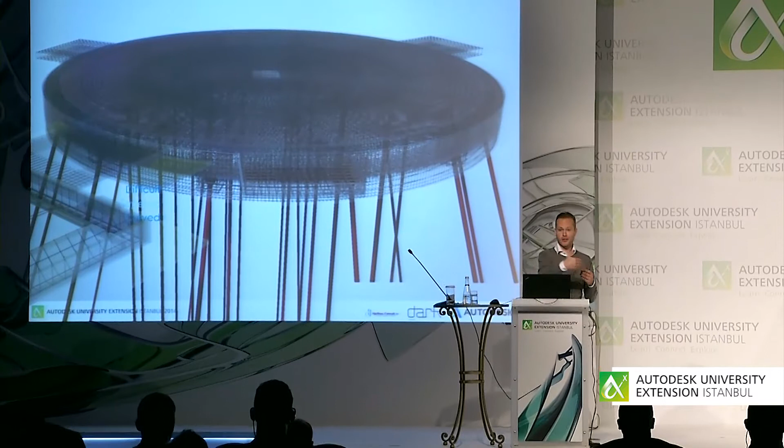And also you have stuff like this. This is a friend of mine from another engineering company in Norway; this was the first project he ever did detailing rebar in Revit, and it was a nightmare because everything is curved. There's not one single 90-degree angle, and it's not the nightmare of, oh, I can't do it and our company is bankrupt. It's the nightmare that keeps you awake at night thinking about how am I going to do this, because you have to model every single bar as single elements and then copy, copy, copy. So this is difficult. It's inefficient, but it's not impossible.

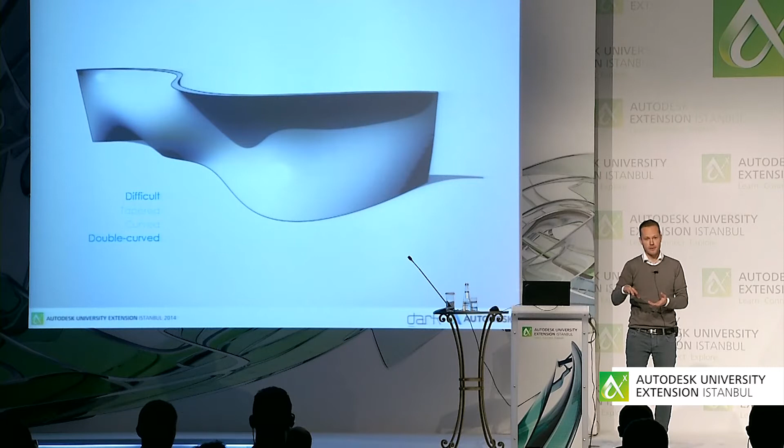Stuff that gets impossible is stuff like this. When you start dealing with double curved stuff, double curved concrete walls, floors, and roofs is almost impossible, I would think. The only way to draw a wall like this inside Revit is if you have a conceptual mass, and you're dealing with splines and stuff, and you stitch a wall to that double curved surface. And when a wall or a floor is hosted by a mass inside Revit, you can't even access rebar tools in Revit. So this is on the borderline between impossible and really inefficient.

My previous company, Ramboll, the company I worked with when I did all this work with rebar, did this project. It's a cathedral in my hometown, actually, which is way, way, way up north in Norway. And special about this project is that every single concrete wall tilts slightly inwards and is curved. So I don't know if it's double curved, but it's pretty complex to model rebars in 3D in this project. So they did everything else but rebar in 3D inside Revit, but all the rebars were afterwards modeled with just lines and Excel spreadsheets like before.

Now, actually, I've done this presentation before, and this list of stuff that's difficult inside Revit was longer. The first time I did this was in Las Vegas in 2012. The list was really long, but it gets shortened every year. Every year a new Revit comes. So all the stuff that was difficult before, except the tapered member, the curved stuff and the double curved concrete, has been moved to the easy part. So this is getting to be a better presentation over the years.

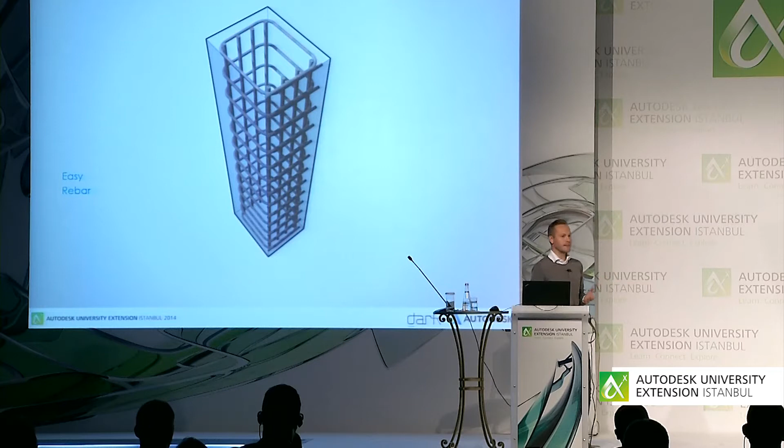So the easy stuff: everything that is 90 degrees, everything that is rectangular, everything that is uniform, straight, which at Ramboll was like 99% of all our projects, is really easy. It's really easy to deal with the hooks and the shapes. National code shapes, no problem. Custom shapes: I did some modifications to the rebar shape families inside Revit to make them work in our company, in our region of the world. And they are really cool once you get to know the small hacks that you have to do. Small hacks that will enable you to deal with angle-driven rebar shapes that don't come out of the box with Revit, that you have to make yourself.

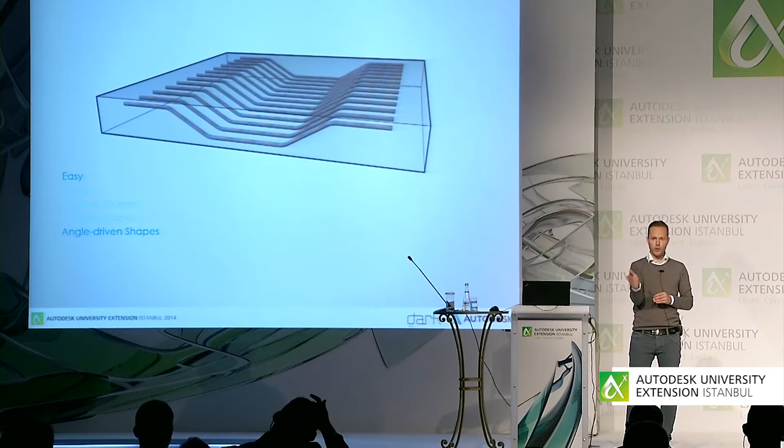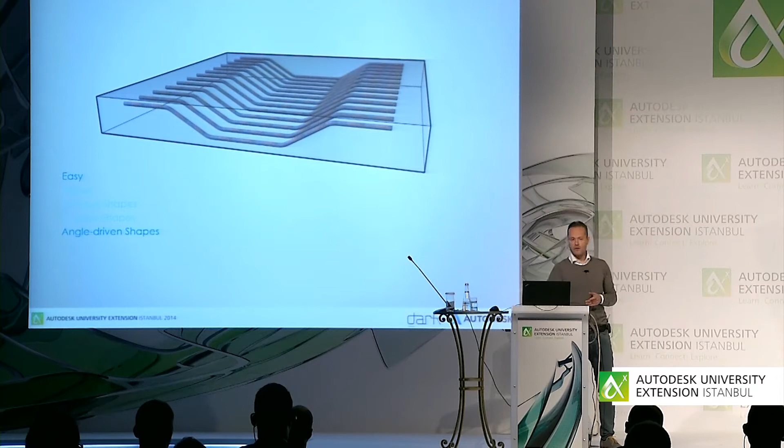In 2010, Revit took a slight change of direction when it came to rebar detailing. I had a meeting with one of the presidents in Autodesk at AU in Las Vegas, and we were talking about this. One of the first features that they introduced after that meeting was the ability to host three-dimensional rebars inside big areas, floors and walls, stuff like this. It became insanely more efficient in, I think, Revit 12 or 13. This was huge. And this was the day when this feature was introduced, and I'll show it to you afterwards.

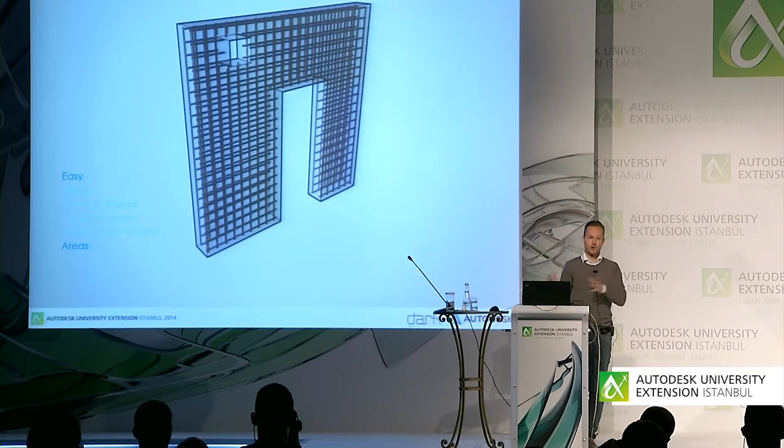Same thing you can do with path reinforcement. So area and path reinforcement in Revit was previously not, you couldn't schedule it, you couldn't see it in 3D, but now you can do both. And this is just a simple exercise for showing how path reinforcement can host three-dimensional rebars. Wire fabric mesh was introduced a couple of versions ago. They work really well, both for detailing and just rough design.

And one of the biggest problems with Revit and rebar was the problem that has to do with symbolic representation, because there's no element in the building industry that has the same amount of quantity. And that relates directly to problems of communicating. How do you communicate rebar design? Because if you have a plan drawing and you're looking at all the rebars as black, you cannot send that drawing to a contractor because it's impossible to understand.

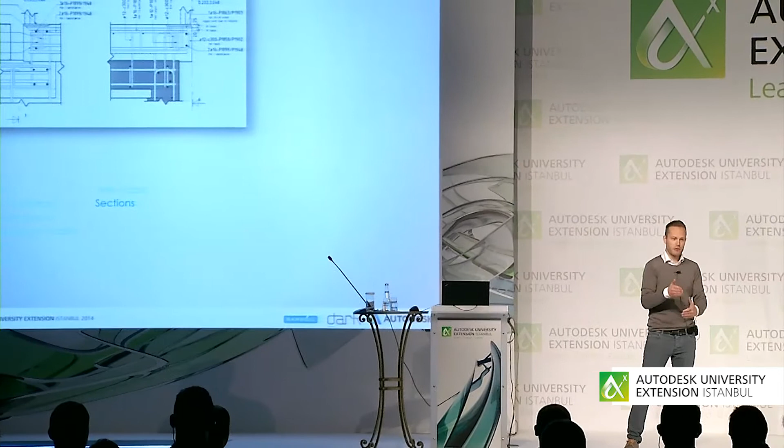So for 10 and 20 years, people have relied on symbolic representation. You draw one bar that represents a whole range of bars, and then you have some text that says this is really a number of bars. And this was impossible in Revit previously. So the good thing previously was the small sections, because then you're actually looking at how it looks in reality, and you're not relying on symbolic representation. So sections have always been really efficient inside Revit when it comes to reinforcement design.

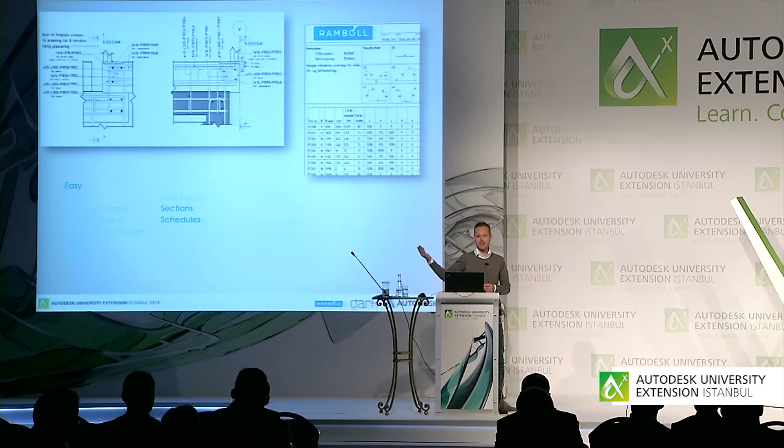And also schedules, because you have a live parametric database, so every single rebar you change is automatically updated in your bending schedule. This is both good and bad. We have some issues with bending schedules. You don't want your bending schedule to change unless you have control. So there's some quality control issues with this, but I'm not going to go into detail there.

But basically this is one of the things that we had to introduce. When you introduce new technology in a company or in a project, I always like to do it face-to-face. So one of the things that we had to do in order to make this work was to do a different bending schedule than we did before. Before, bending schedules were done in Excel. You had 10 bars on each side, and you have lots of A4 papers. This is difficult in Revit.

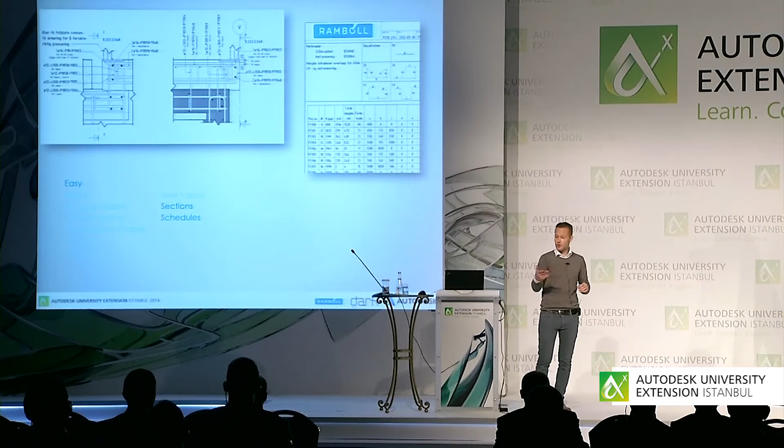So I went down to the contractor. I brought the new bending schedule. It was larger. It had more bars. And I sat next to him for like 30 minutes, explained why this is good, and showed him a beautiful 3D section of the rebar. And he said, okay, we'll do this.

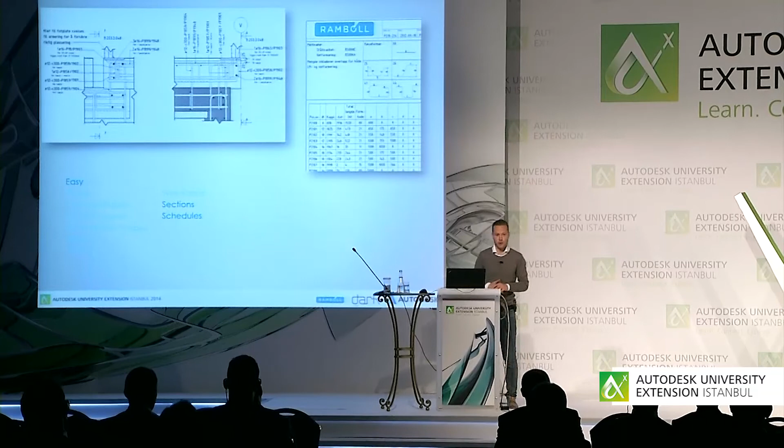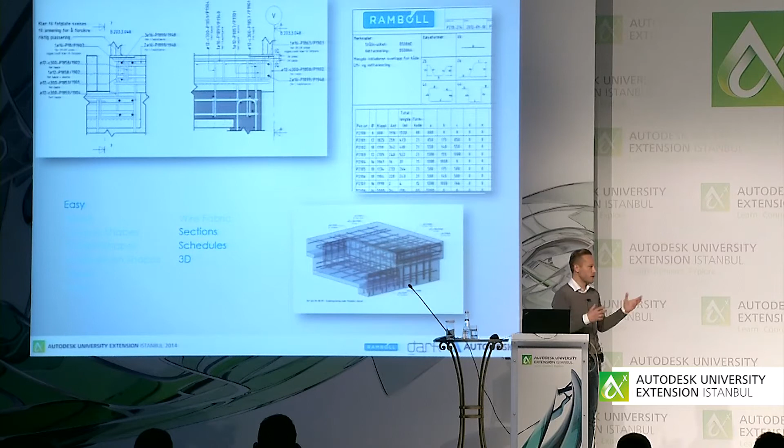Which brings me to the 3D. When you have modeled everything in 3D, you have a fantastic way of communicating with people. You can show them a section boxed 3D view inside Revit with transparent concrete, with all the rebars tagged for information purposes. And now also with 2015, the big enhancement of productivity inside Revit is that this is actually a plan drawing that one of my colleagues did at Rambøll. Peder is his name.

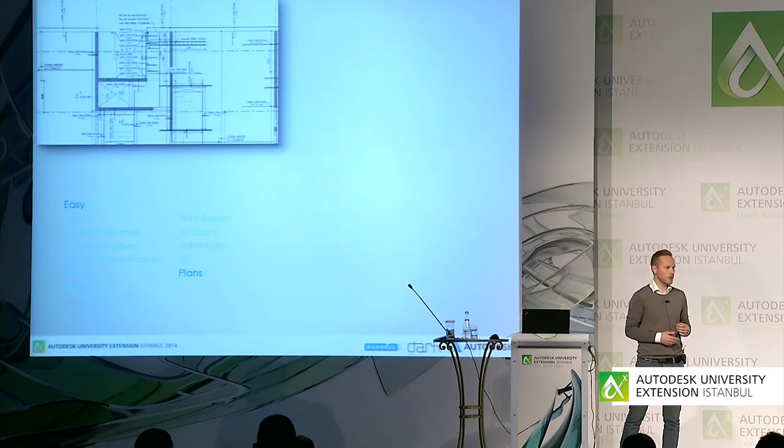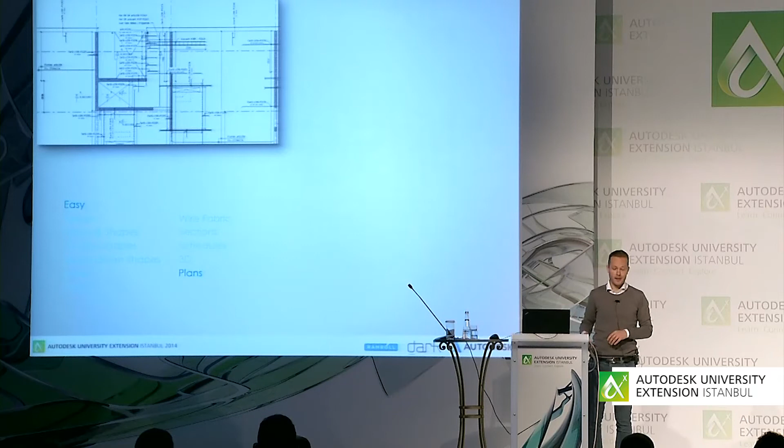And up until April this year, we had to model all the rebars in 3D for scheduling purposes and the 3D. But then we had to draw detail components inside Revit on top of the drawings afterwards for it to be understandable for people. My friend Peder didn't know anything about AutoCAD, so he would rather do that in Revit. I'm happy he did, but now this is automatic. I'll show you afterwards. Same thing with big sections. Everywhere you have to rely on symbolic representation of a set of rebars. It's much easier now.

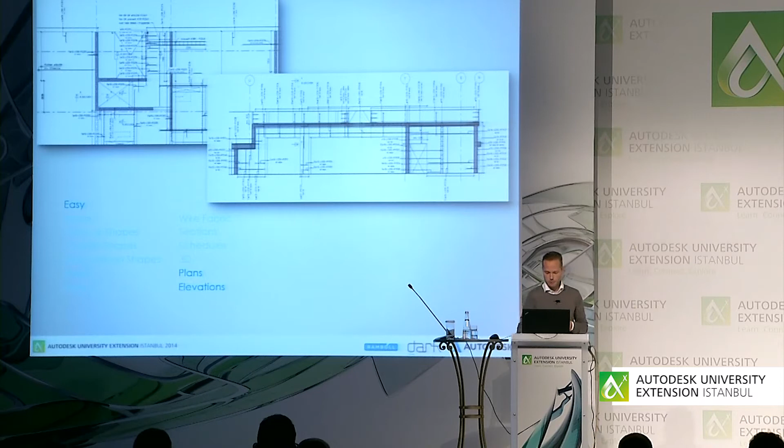Just a short selection of the first projects that we tried. Like Lynn said, we didn't go all in on the biggest project we had. We tried a small project first. This is just a simple retaining wall outside the capital of Norway.

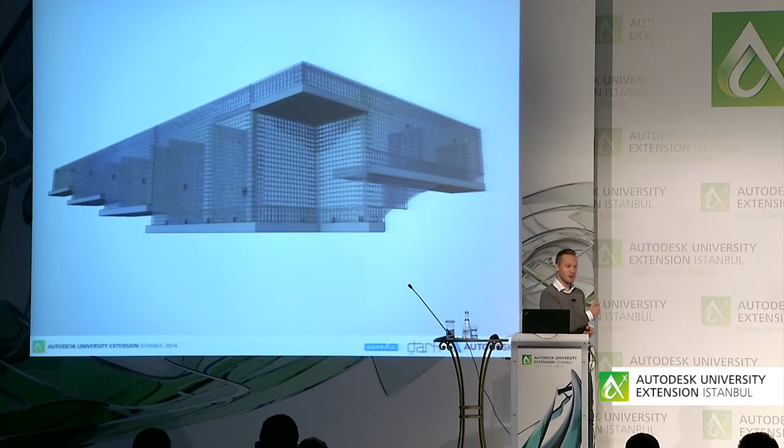And I modeled this, and I can say with my hand on my heart that it was pretty fast and pretty nice to do. I had to do all the symbols with detailed components afterwards, but it was pretty fast to model it. You just have to have a lot of sections and a 3D view with solid rebar. I'll show you afterwards. My friends, this is Erling's work.

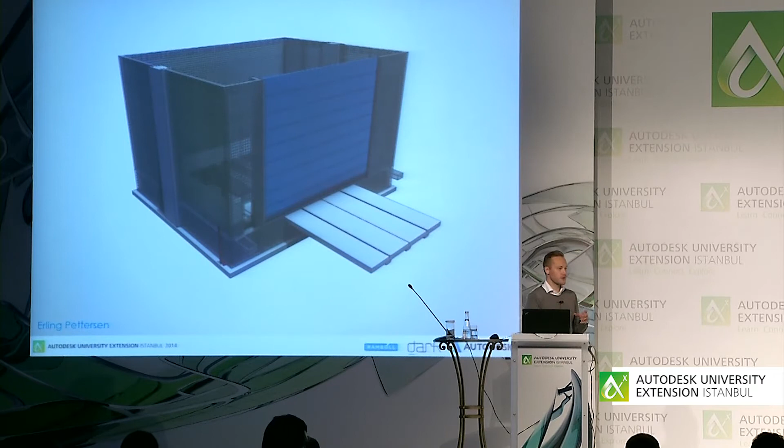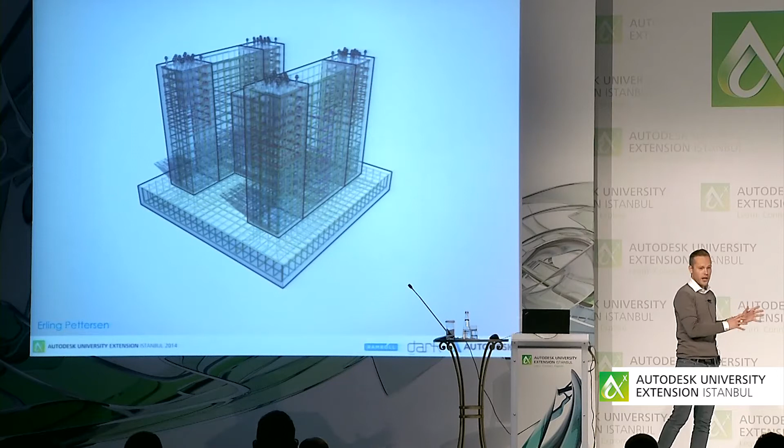A lot of rectangular buildings, as you can see. This is like small power stations. Really fast to get all that rebar inside. And when you have 3D views, you can do cool stuff like, of course, with transparent concrete, you can put on some shadows, work with ambient shadows, and also view filters for color overrides and stuff. This is pretty common for all 3D detailing software with rebar.

More power stations, and then we moved on to bigger stuff. And I'll show this Revit model afterwards with all the rebar in it. This is an apartment complex inside Norway that my company did. And it was the first sort of semi-big, medium apartment project that we

modeled rebar in. A thing that I forgot to mention is that as a Norwegian engineer in Norway, and I think across the Nordics, I have to detail every single bar that goes into cast-in-place concrete. Every single bar. So in this project here, there are some prefab structures, but basically everything you see has to be populated by tons of rebar.

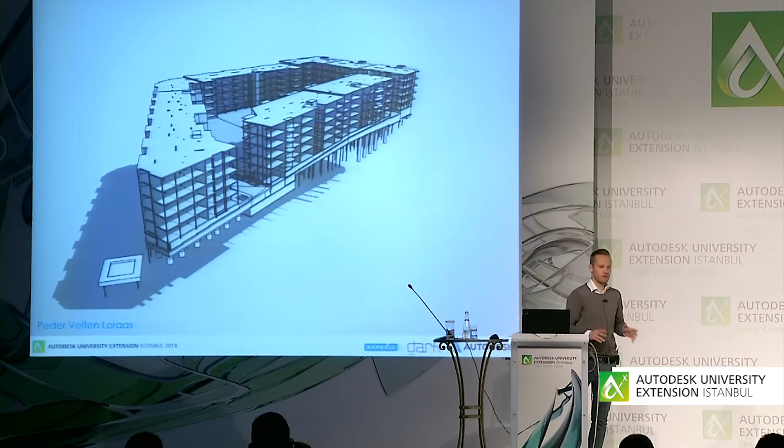And of course, everything I do in Revit, I have to make a perspective and make it beautiful. I think rebar is beautiful. When I go to job sites, I have to go and feel it and look at it, and I think it's pretty nice to see it through concrete. One day I have a dream that I will be able to see transparent concrete on a building, so you can see your rebar designs in real life. Because this is the stuff that people never see. I think this will be beautiful.

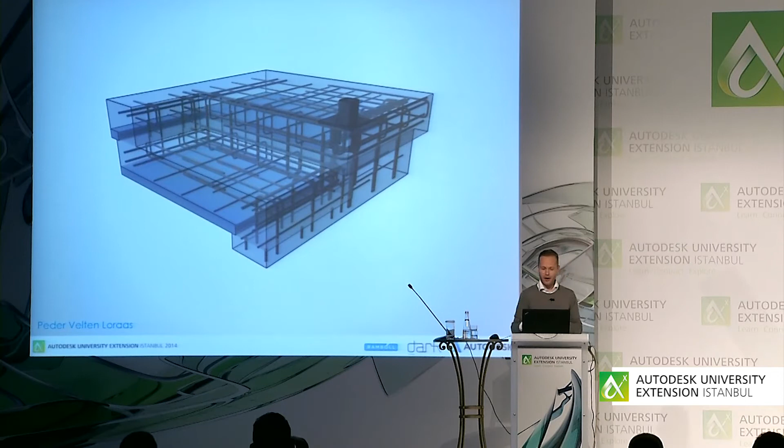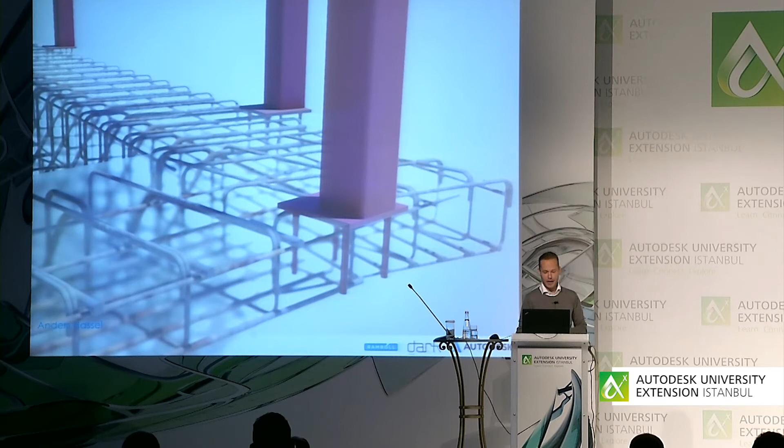So with that, I'll move to Revit, which is actually my favorite software, far more comfortable inside Revit than PowerPoint. So I'll just give you a quick, simple demo of how this works. The first thing that I always do when I deal with rebars inside Revit, I go to structure, reinforcement settings. You have 3 settings. You have the cover settings, you have the reinforcement settings, and you have the reinforcement numbers.

Rebar cover settings, pretty easy. When you click on a concrete element inside Revit, it doesn't have cover settings where you can type in any kind of cover. It has a selection of covers that you can choose from. And this you can set in the rebar cover settings. I'll go fast. Reinforcement settings, you got some general settings. This first one's very important.

That's actually the tick mark that makes all your area and path reinforcements host 3D rebar. So this you absolutely have to have on in case you want 3D rebar inside all that area and path reinforcement. The second one was introduced, I think, last year. You can now choose to not have rebar hooks in your rebar shape definition. I don't know if that makes sense to you. I always keep it on. The moment you

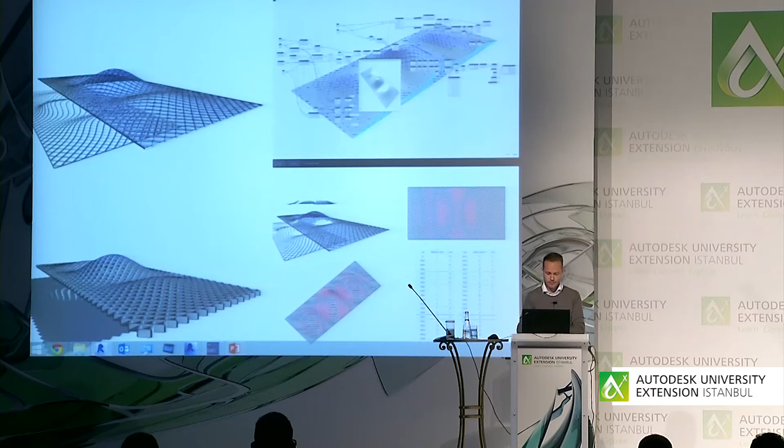I'm sorry, guys, but I think I forgot to switch to Revit. There we are. Can you see my screen? Okay, so a quick recap. I'm inside Revit. I have a beam. I go to structure, reinforcement, cover settings, and reinforcement settings. Sorry about that. Windows 8.

So you want to keep these on. You can go to reinforcement rounding and do some stuff that will help you work with bending schedules inside Revit. So if you don't want to model every single bar to the nanometer, you can have it round inside your schedule and then just model it roughly. It works on bar segment lengths and total lengths. And then in 15, the new feature that was introduced with reinforcement representation. I'll show this in a different way.

Now the cover setting, when you click on a beam like this, you have on all concrete elements inside Revit parameters for rebar cover top, bottom, and other. Other is, for a simple beam like this, the sides.

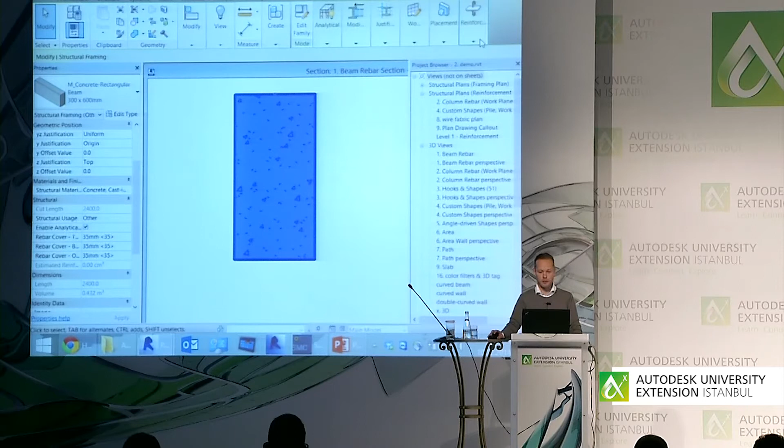So I normally model rebar by going to the reinforcement tool. I click on the concrete element first. I go reinforcement rebar, and then I choose a rebar shape from the rebar shape browser that automatically pops up. If it doesn't, you can also use this pull-down menu here.

And then I choose the rebar diameter from rebar bar, 12, 8, 14, 16 millimeters. This is all set up in your template, I hope. The rebar bar really just populates two important parameters, the material and the bar diameter. All stuff like bend diameter and hook bend diameter and all that stuff that's in your national code just goes into your template and you never touch that again.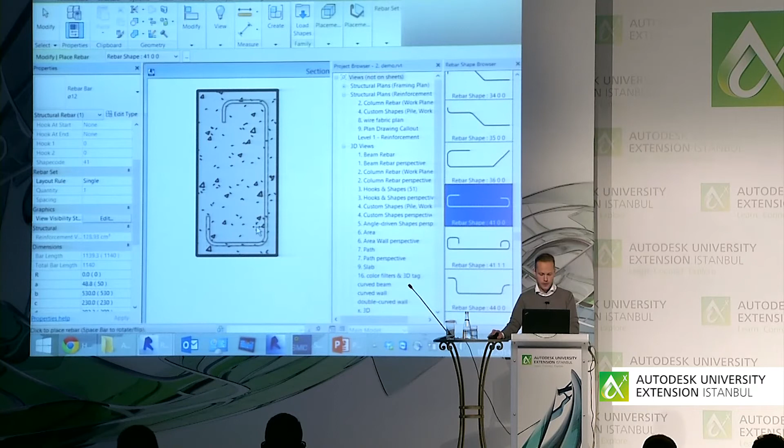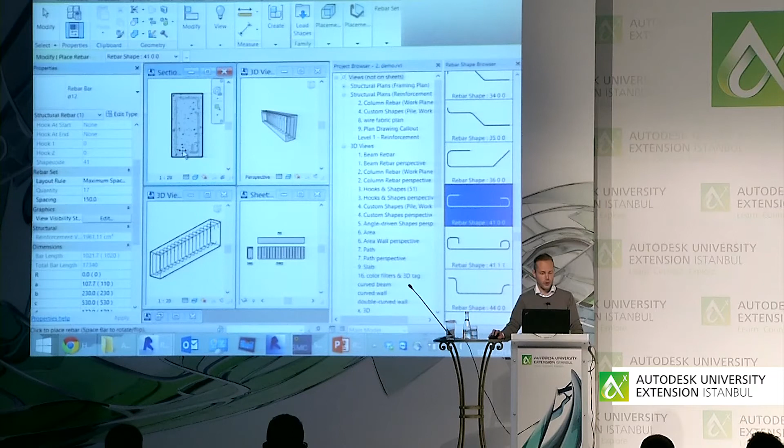Due to screen resolution issues here, it's sort of hidden, but the first thing that I always do is, let's pull up some views here. Is this possible for you to see? So I go rebar set, and then you can change it to maximum spacing with a spacing, say 150 for instance. And then when I populate my beam with rebar, you can see that it turns up in your 3D view.

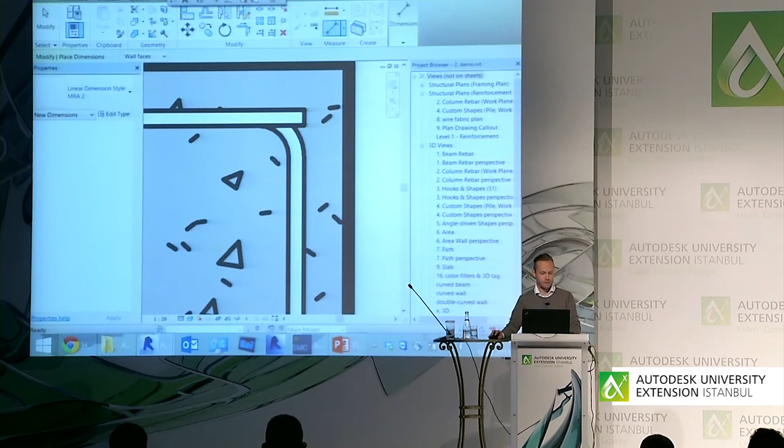Actually, with a pretty irritating small feature that it will not automatically always extend to the outside of your cover setting. So sometimes I have to pull these out like this. The rebar will always snap to your cover. There's a tolerance, so if you pull it to the cover, it will always snap to the cover, but if you pull it like this, it will release the snap to the cover. So this is both good and bad, depending on what you're doing.

If you, for some weird reason, need this rebar to go just 1 millimeter from the cover, that's going to be a little bit difficult, but you can work around it by clicking on a rebar and changing the host to another host temporarily. I miss this feature in Revit, I want to sort of explode or freeze stuff so that it doesn't change. That would be nice, I think. And one way to do that inside Revit actually is you can just group an element. Just click on an element and go create group. It will sort of freeze the element.

So let's have a look. I'm going to minimize this at a perspective view, of course. One thing you need to keep in mind with rebar is that it will always default to a single pixel thickness in your 3D views. And this is odd behavior again. You can change this by clicking on a rebar and using the parameter view visibility states inside the properties. So this is normally what I do.

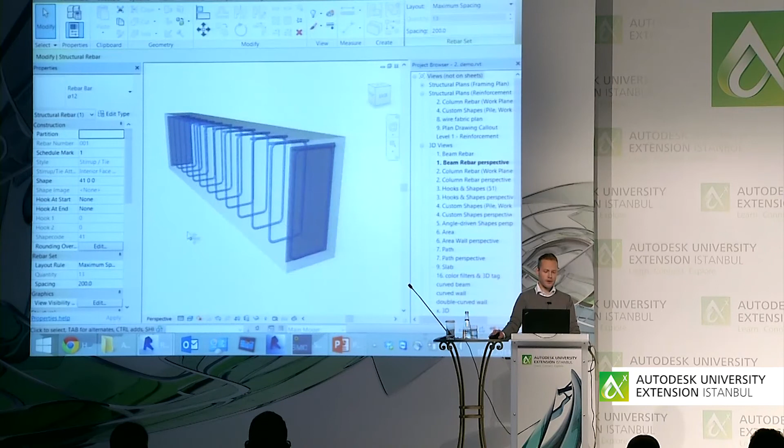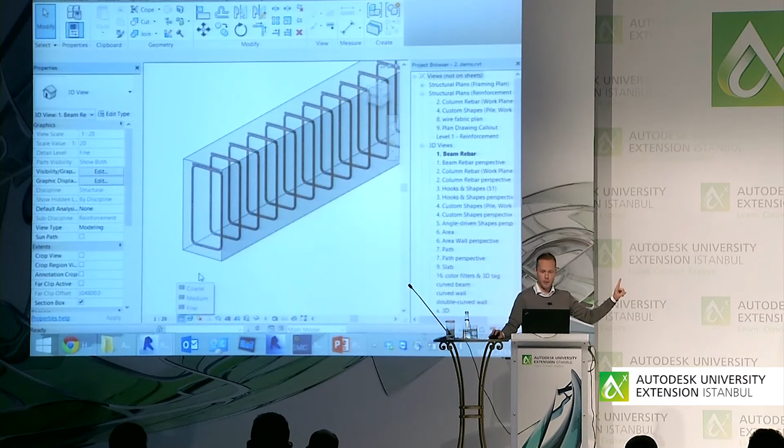There's sort of limited stuff you can do in a perspective view, but if I open an orthographic view, also, you have to be in fine detail level. If I change it to medium detail level, it will force the 1 pixel thickness of the rebar. Let's change the length of this beam to 3.5 meters. It will automatically expand all that rebar. Well, it expands somewhat. Let's try something different. 5 meters. It actually does, but I have a section box here. Sorry about that. 2 meters, 2.5 meters.

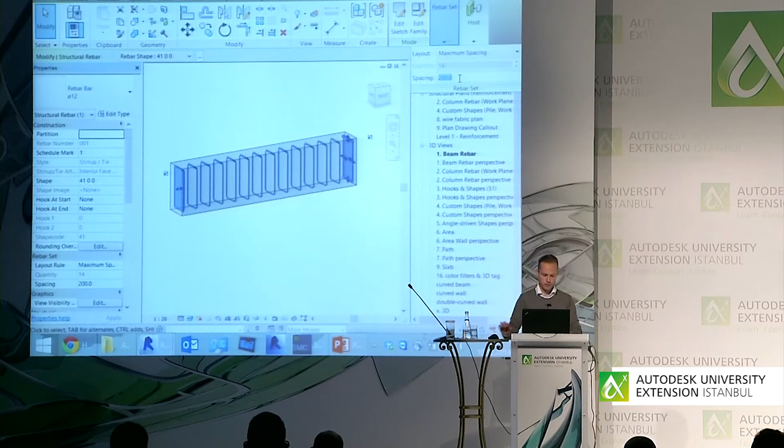And let's change the rebar set again to 100, really tight stirrups there. Okay, so that works pretty well. Also, if you change the section of your rebar from 3 to 4, it will always expand. So the rebar will follow your covers. It's hosted by the element. And this is very, very nice when you're designing. But when you have issued your bending schedules, you want to maintain control of what you're doing.

So let's change that back, and then I go back to the section. I have a sheet here with some more views. So let's add some main rebars to this beam. I go rebar, and then instead of having the placement orientation parallel to work plane, I go parallel to cover. I change the shape to a straight shape, and the section to something bigger, 32.

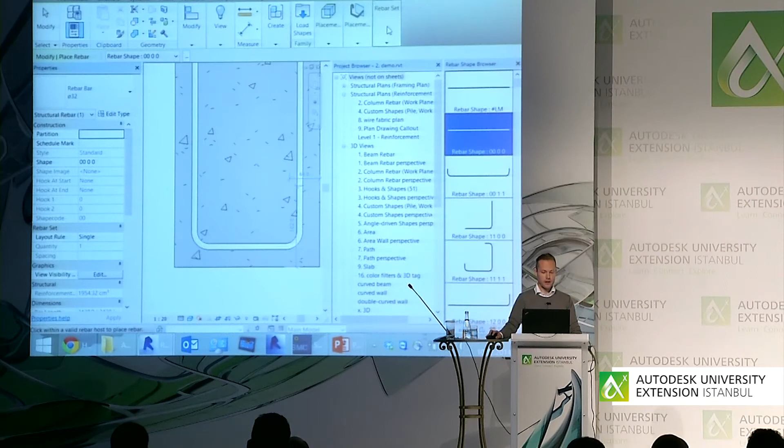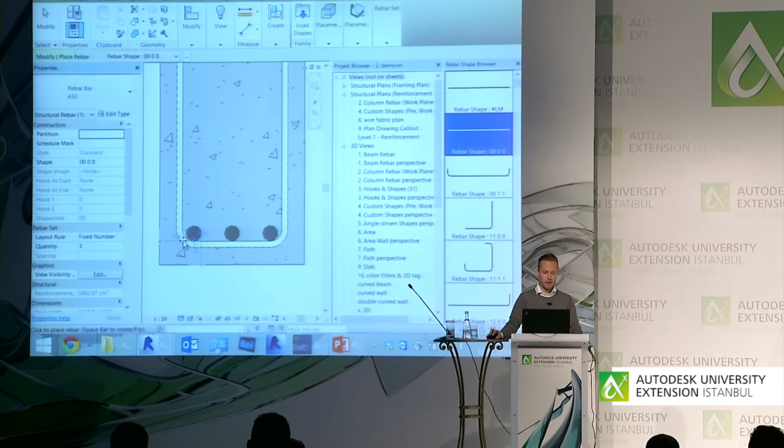And then I go rebar set, single, fixed number, 3 or 4, and then you'll see that the orthogonal rebar will snap to the insides of your stirrups. This is also pretty nice. Lots of good automatic behavior here. Oh, I clicked wrong. Let's do that again. Like this, and then like this, and then I delete this one, and then I change this to, let's say, 2.

Now, in case, for some kind of reason, you don't want this rebar to snap to the stirrup, you have to change the setting inside the rebar shape family. This comes from the automatic behavior connected to the style of this rebar family. So rebars inside Revit, when you model a 3D rebar like this, are made of 3 sub-elements. You can sort of see them in the project browser here. Sorry, there we are, families.

You go down to structural rebar. You have the rebar bar, which is the material and bar diameter. You have hooks, which basically just have like 3 parameters. And then you have the rebar shapes. And the rebar shapes inside Revit is the only family that you can edit in the family editor mode. And you can see this if you click on any kind of rebar. You have a selection here, go edit family.

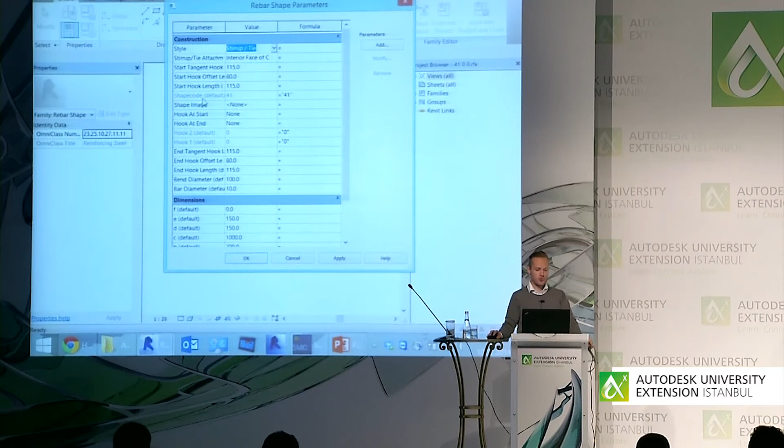If I click edit family, what I really open then is the rebar shape family. That is like the 3rd subcomponent of the rebar. So this is where you set up your rebar shape. And this particular rebar shape is a closed stirrup, and it has all the settings. Like you can go here and say that it shouldn't be a stirrup tie, it should be a standard rebar, and then the orthogonal rebars won't snap. Lots of custom stuff you can do in here. I added some shape codes and some hook parameters for scheduling purposes.

There's also a weird thing inside the rebar shape family editor. I'm just going to show this to you quickly. No other family inside Revit, in any version of Revit, can have one parameter control 2 different segment lengths. So if I change this parameter here to A, for instance, now you have A here and A here, and I can change the length of this to 280. A here will still be 200.

Now, in case you're not too familiar with Revit, you go, what is this? But this is like magic, Revit magic. And this actually enables you to do stuff inside Revit with the rebar shapes that you cannot do in other families, like modeling closed loops, modeling lines that are on top of each other. I'll show you a rebar shape family that's simpler than this.

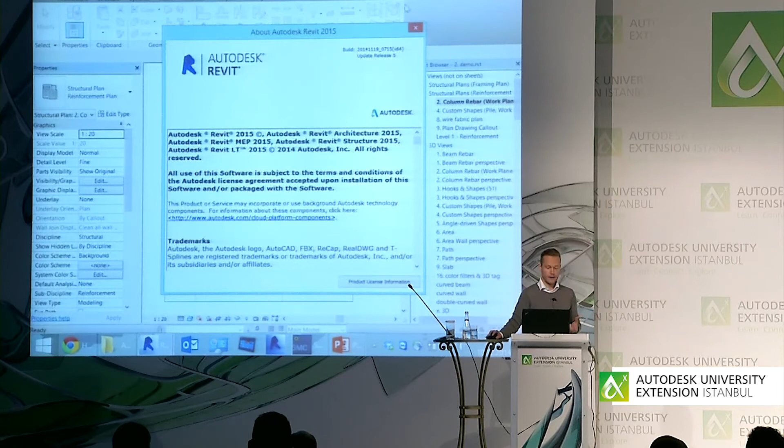We'll skip columns. Basically, if you want to have a happy life modeling rebars inside columns, you should install the latest version of Revit. That is like the update release 4 R2 or 5 R2. That includes some enhancements when it comes to rebar modeling. Before that, and this is just a couple of months ago, you wouldn't be able to place reinforcement in any kind of element that has no view that is cutting the concrete.

So typically for a column, the column goes from level 1 to level 2, and you have a level 1 view. When you're looking down, your active work plane is not actually inside the concrete. That would be a problem before, not any longer. So install that service pack.

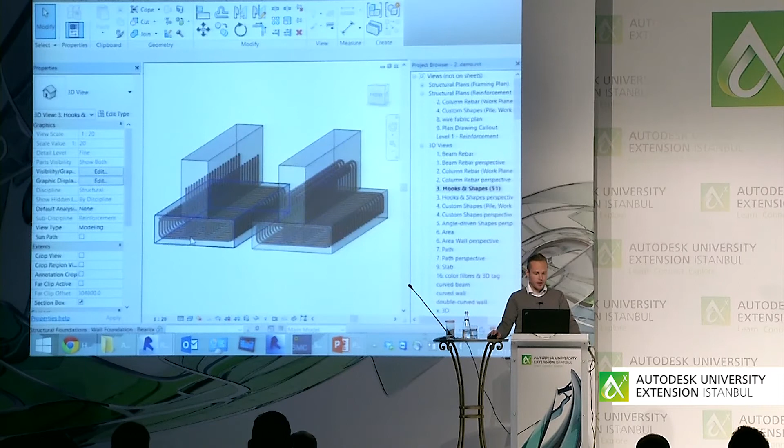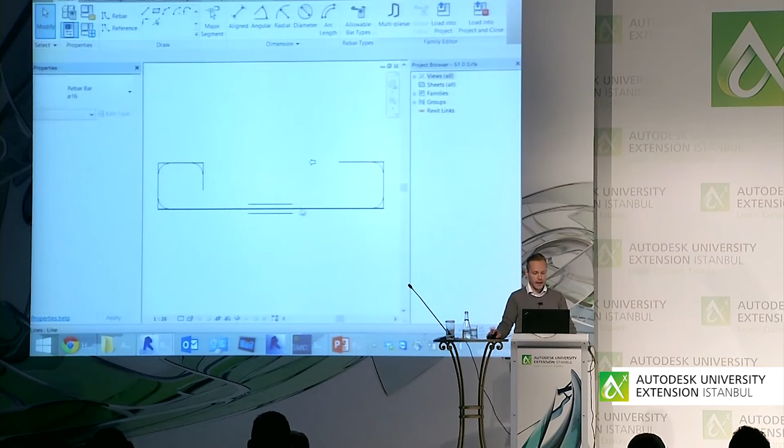And this here is pretty interesting. This is not the 41 shape that I showed earlier. If I open this shape here, which has 2 overlapping lines, I go edit family and again look at the parameters in this rebar shape family. You have an A parameter here and an A parameter there, and they have 2 different values. And this is good because my national rebar code says that these should be the same. But when I change this top A here to 1 meter, I get a warning inside Revit saying you cannot have overlapping lines. So somebody thought about that and made it work. It's working well.

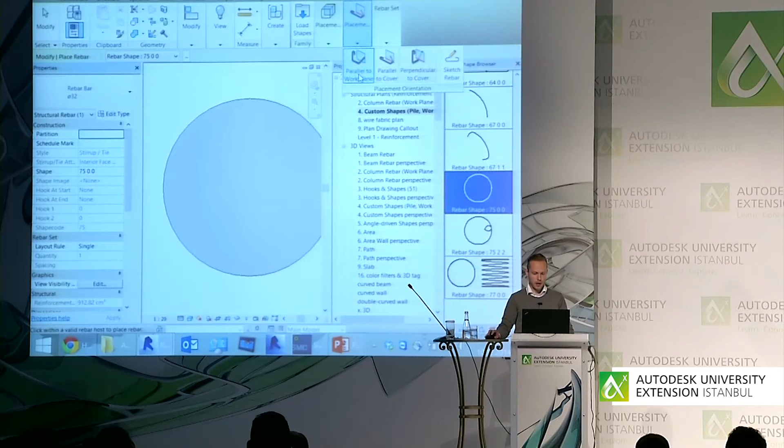Same thing here. If I go to plan of a pile and I go reinforcement, rebar, I choose perhaps some kind of circular shape, placement parallel to work plane, like this. This also is almost impossible to figure out how to do.

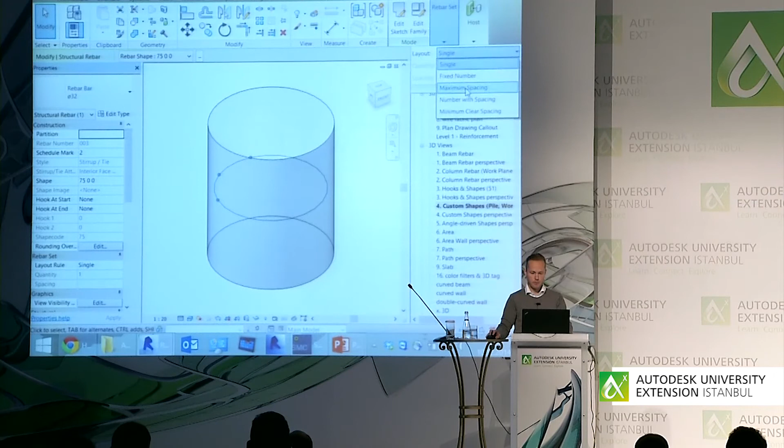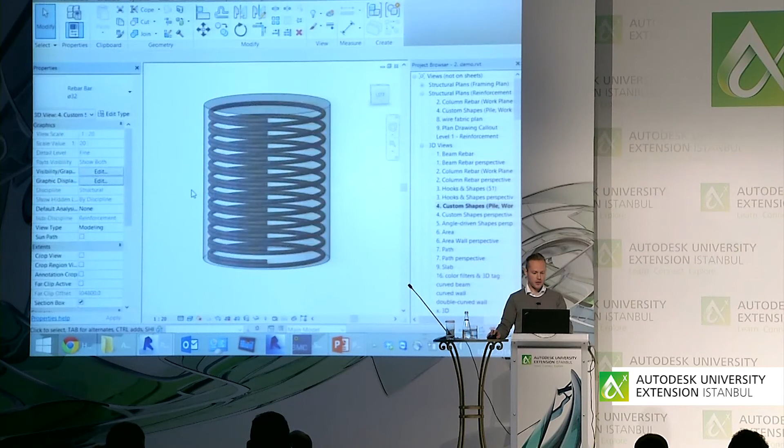Let's see if I can find a 3D view. Like here, I go rebar set, maximum spacing. And then I go view visibility states. This is pretty irritating, view solid. But this actually adds, they don't use this in the States, so they don't know what I'm talking about, but in Norway we use this all the time for circular stuff. Overlapping stuff. Again, in the rebar shape family, you can do this without getting the warnings of overlapping lines inside a family, which is pretty good.

Let me show you the, we'll skip the angle-driven stuff. This is, by the way, all my rebar content. I'm going to mention this now before I forget it.

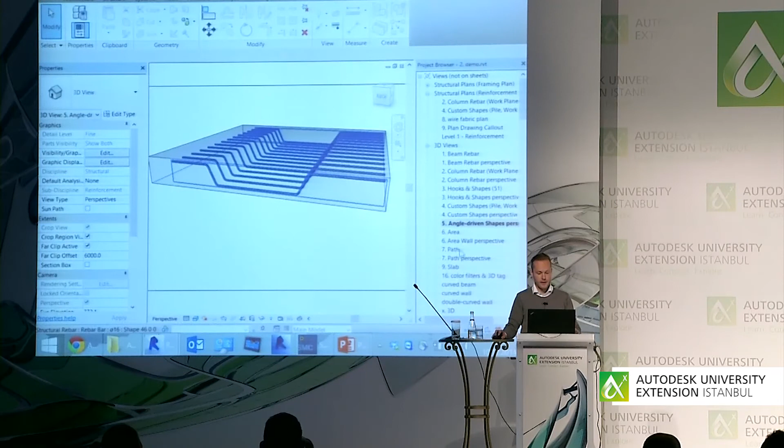So the reason why I'm showing you this is that this rebar shape here actually has some pretty cool trigonometry in it for you to be able to change the angle of this shape. It's inside my rebar library. So let me just show you the new feature that was introduced, I think, in Revit 15.

It's pretty fast. Instead of going into a section and start modeling the rebar inside this wall, you just go reinforcement, area reinforcement. You just go major direction, so I have the maximum moment vertical inside this wall, and you go finish, and it will auto-populate the entire wall with all the rebar that you need. And this is parametric because I can change exterior major spacing to 100, and it will automatically update all the rebars.

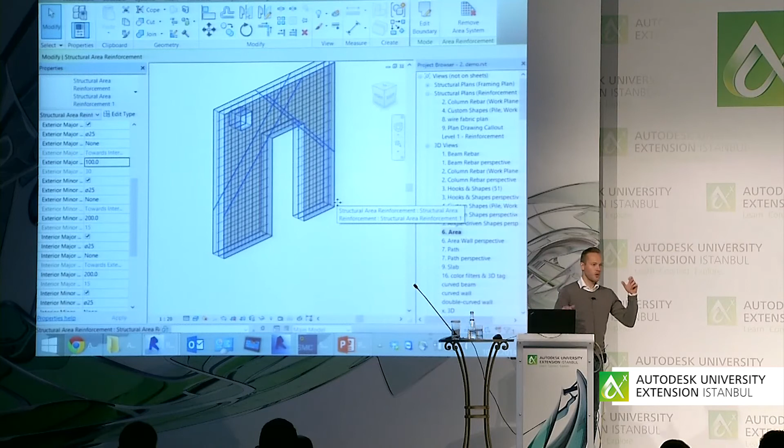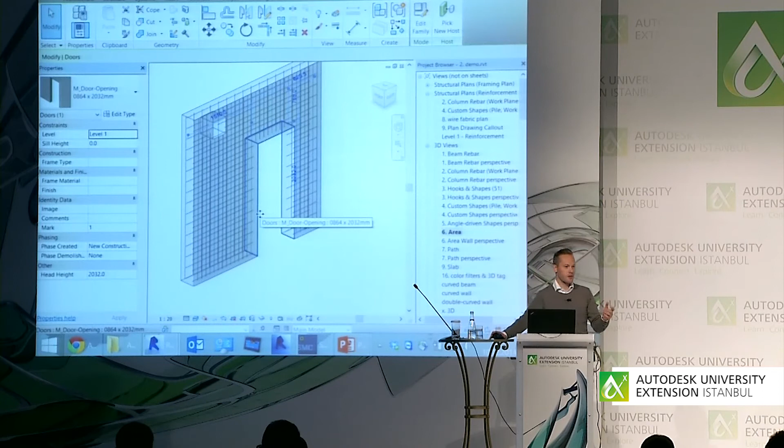So this is two things you're looking at. You're looking at the area rebar, which is just a stupid 2D element, which is hosting all the 3D rebar. And you can actually see here that you get this rebar set over here, and a different rebar set here, and they're all hosted by the same area. And then you can do cool stuff like moving your doors or changing dimensions, and everything will update. Same thing with path reinforcement, and with that, I'm going to move back to my beam.

So this is like groundbreaking stuff in 2012. I'm going to show groundbreaking stuff from 2015. And this is this here. For this purpose, I will close my properties palette for maximum screen real estate. So basically, you had two choices before 2015. Either you show all the rebar, which I earlier explained is basically impossible because it's black, or you hide everything and draw lines on top of your 3D rebar.

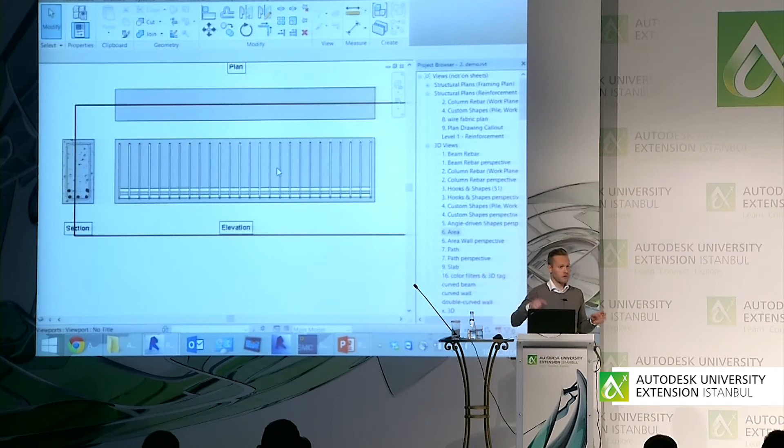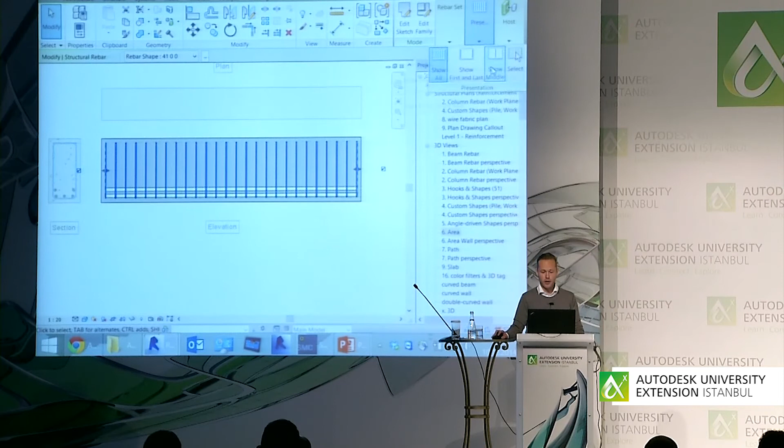Now, in 15, you can do stuff like this. The developers, the beautiful people in Autodesk Boston and Krakow, are doing this each year, making new functionality inside Revit. You can go presentation, and these were unavailable menus before. You can go select, and then go select none, and select this rebar I want to show, finish, and voila.

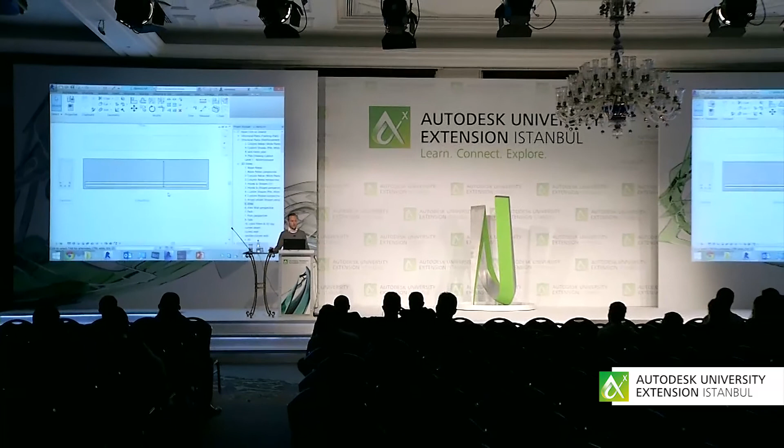So my friend Peter doesn't have to draw the detail lines any longer. It doesn't have national code, super complex symbols for bendings and stuff, but this is pretty efficient compared to what he had to do previously. Cool thing with this is that it's view dependent. So if I go into this view here, again, I have to change the view visibility states.

They can't get this right, I don't know why. So you want all the 3D views to show view as solid, and you want all the plan views to show view unobscured, that is like through the formwork. So now I can see it properly.

So I click on the stirrups, and of course you're familiar with the Revit database, you select it, it's active in all the views representing this element. And then I can go presentation, select, check none, and this bar in a different view. So you have the same element showing up a different bar in two different views. And this is valuable for you as a reinforcement designer for making your drawing beautiful.

Two words on what I had to do with schedules to make bending schedules work. I don't know how you deal with lap splices in Turkey, but in Norway we have something called a running meter bar, so I can basically model a bar 150 meters long and have my schedule automatically add lap splices. I won't go into detail here now, we're too short on time, but in case you want to check that out, it's in my handout, all the calculations, it's pretty cool stuff.

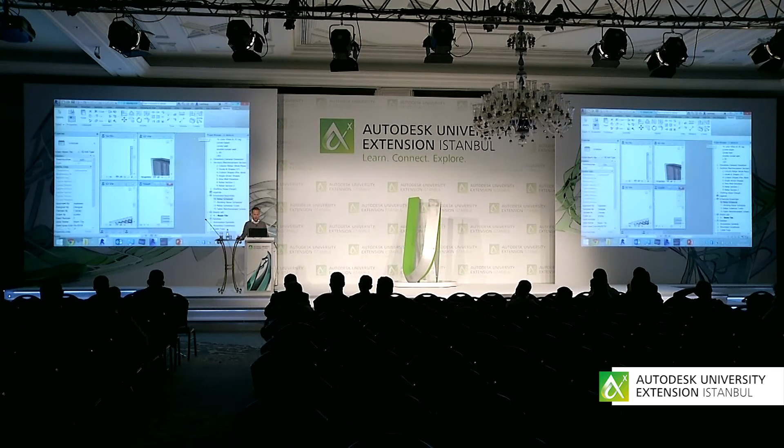And with that, I will move to visions of the future. For details on this, check out the handout. I will now open a project just to have a few words about what we did and the size of stuff. So this is like five-story apartment buildings plus basement. You can see that this building here and the other part here is a different part. It's a different Revit model really.

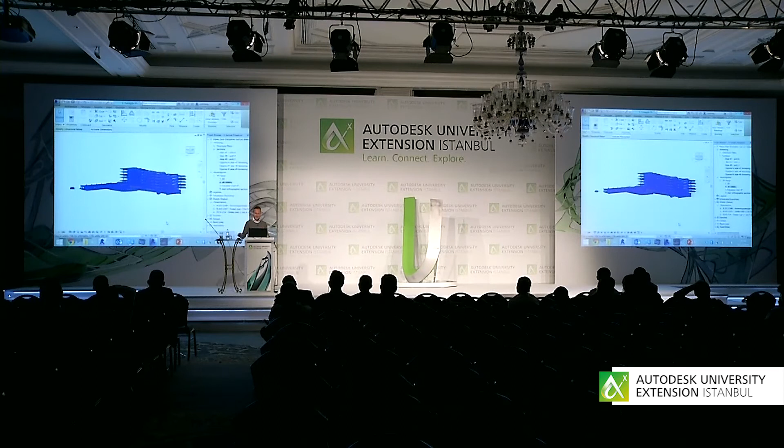So this was the first model that we started modeling rebar inside. So I have a 3D view here with all the rebars. This is just pulled out of production. So it's not complete, but just to give you a view of how this works with regards to performance. So I have here, let's see, 8,553 rebar sets. So that's probably like 100,000 rebars. And this is 20% of the building.

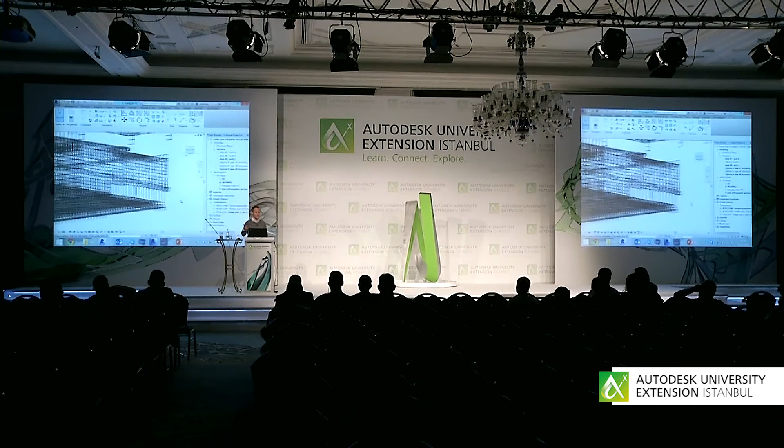And check out the view performance. This is pretty fast. And also file size, it doesn't add to the file size because the Autodesk developers, you can say a lot about them, but sometimes they're just genius, because they made this like a cheap 3D, it's not really 3D. So every time you see a rebar inside Revit, it's not really 3D. Your screen is showing you a 3D sweep, but it's not really. And this makes it really fast, both with file size and view performance.

Now the view performance, I have to say, looking at this model here, they did improvements on view performance in 15 and 14, but also all these bars are shown with the single line pixel, no thickness. So when you turn on the thickness, this will go a little bit slower.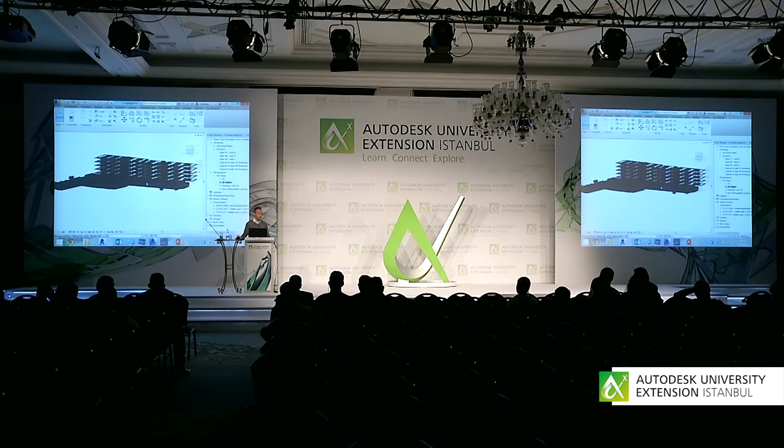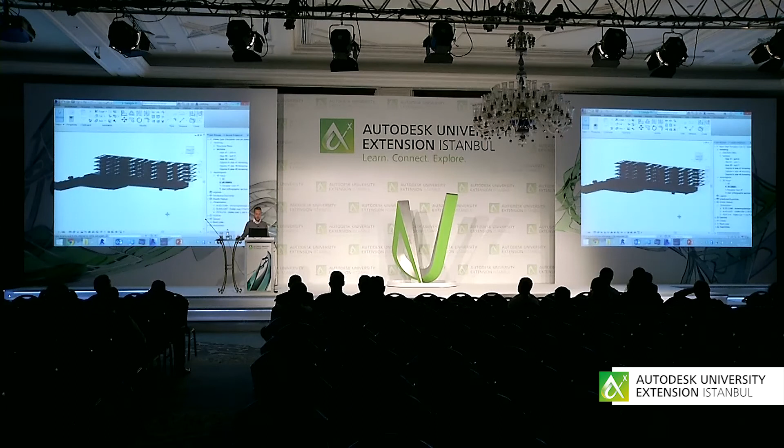And now, the important part. When you have modeled all these bars in 3D, what can you do? You can change the world. You can change the building design industry inside your company, inside your projects, inside your country and the world. And this is actually happening right now inside Norway.

So I'm going to show you now a project that was not designed by me or my company. This is a friend of mine who is the BIM manager of the biggest construction project in Norway right now, and they're using BIM for everything. The architect is using Revit Architecture, and my friend is using Tekla for reinforcement design.

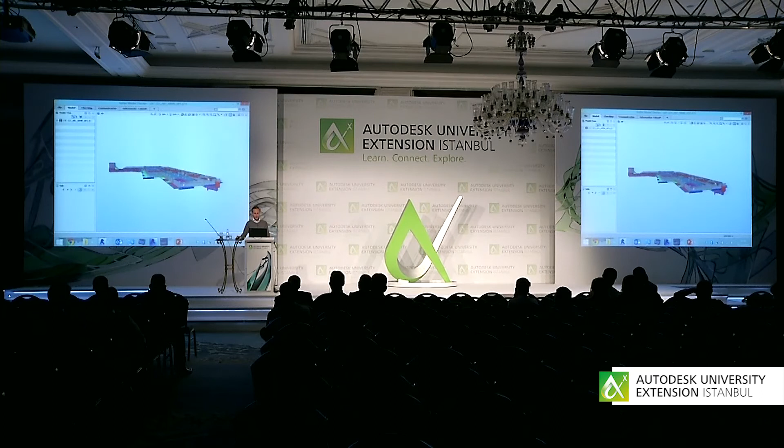And what this company, Aas-Jakobsen, is doing, they're modeling all rebars in cast-in-place concrete in 3D inside Tekla, and they're exporting it to OpenBIM, to IFC files, for the contractor, NCC, to work with 3D models instead of reinforcement drawings and bending schedules.

So I won't lie, they still have reinforcement drawings on this project, but what the contractor is doing, and not only the contractor, but the fabricators, Celsa Steel Service, biggest fabricator of reinforcement in Norway, they are importing the IFC files from Tekla directly into their cloud service that is connected with the machines that are bending the bars.

So all this manual labor and room for error from physical spreadsheet into machine is being eliminated by just utilizing technology and talking to people. You have to go to them and look them in the eye and show them that you love this stuff and you're enthusiastic, and then they will believe you.

Okay, let's do this. So basically the contractor can use an OpenBIM IFC viewer like Solibri. This is not Autodesk software, but it's really cool because it enables the contractors to choose to have one simple software, and then they can get BIM or reinforcement models from any kind of vendor. For instance, Revit on one project or Tekla on the other project. And the contractors in my country really like this.

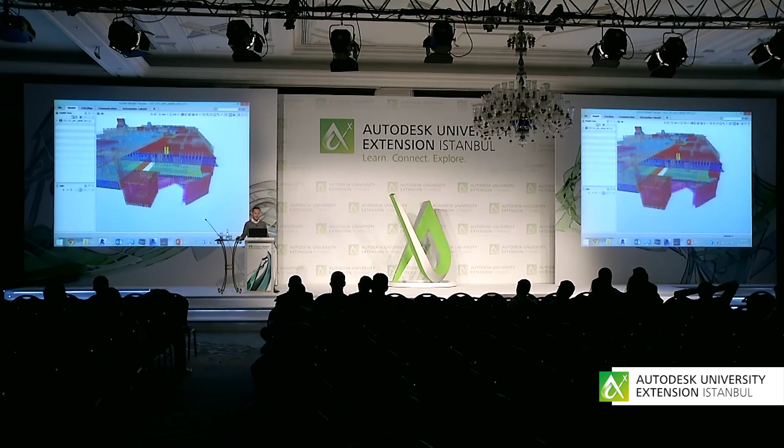So basically, everything here is in 3D, and they can go information takeoff. They can load a quantity takeoff. Go recent. I made a quantity takeoff during the Design Computation Symposium in Las Vegas last week. It looks like this, and they go take off all, and all of a sudden there's your bending schedule.

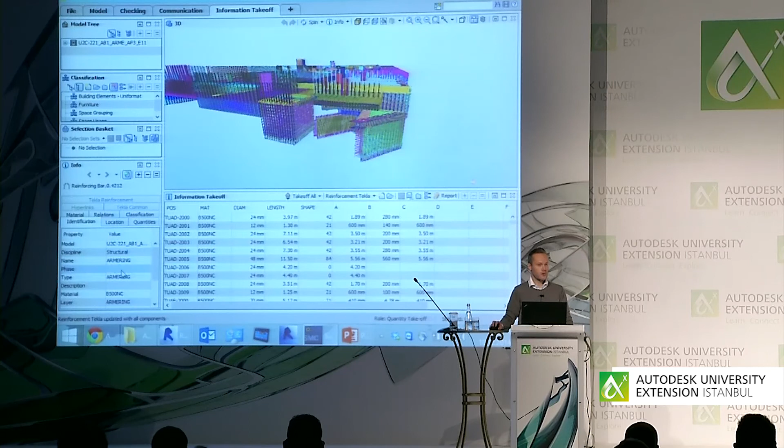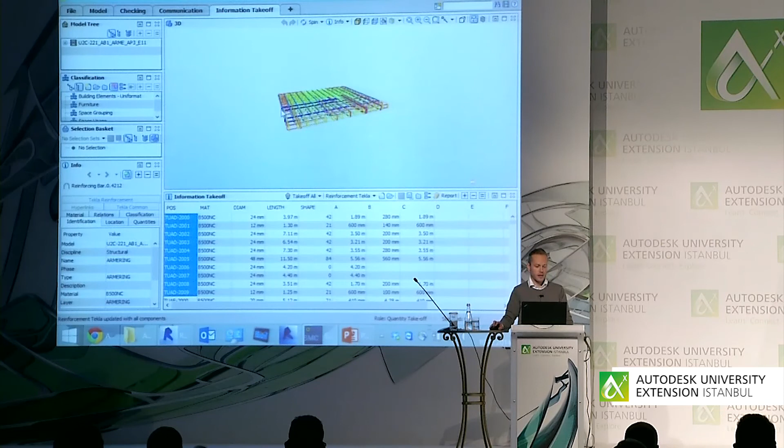So you can have the 3D view here. You have all the information from all the bars inside property sets inside an IFC viewer, and then you can just select a couple of bars and look at this section, so this is the reinforcement numbers. And IFC and Solibri is really good at this, working with the information takeoffs.

So when I was a new engineer at my engineering company in 2003, cold winter months in Norway, I sat and looked at reinforcement drawings and my Excel spreadsheet, and I couldn't understand anything. And I spent a year trying to figure out all the symbols and all the stuff. To move from there to this is changing the world of design. And not only reinforcement design, but all kinds of stuff.

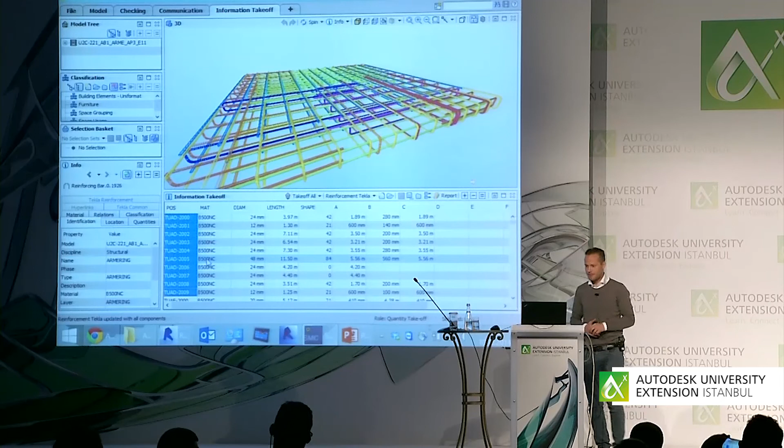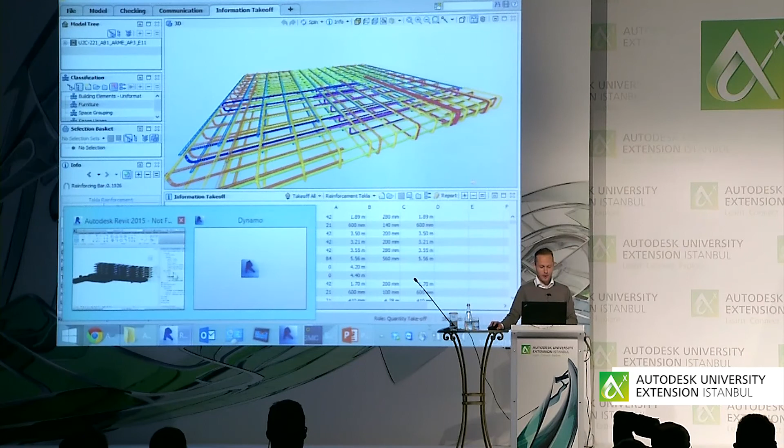And this is happening. This is not a sales pitch, it's not a demo, this is real world stuff. This is the new airport extension in Oslo. So last of all, since I have 5 seconds left, I want to show you the coolest thing ever, and that is this. And this is the sales pitch. Although it's free open source software, this is where the world is going.

So I've spoken a little bit about the geniuses at Autodesk and how they make cool new features inside Revit, but for decades, ever since the personal computer became mainstream in all offices, we as designers have been slaves to what software developers have done. They have to understand what you need to do. And they sit at their desk, program their stuff, put it on a DVD and ship it to you, and you buy it for £100,000, and then you install it and open it and go, oh no, that doesn't really work. So this is changing, and what you're looking at here is visual programming.

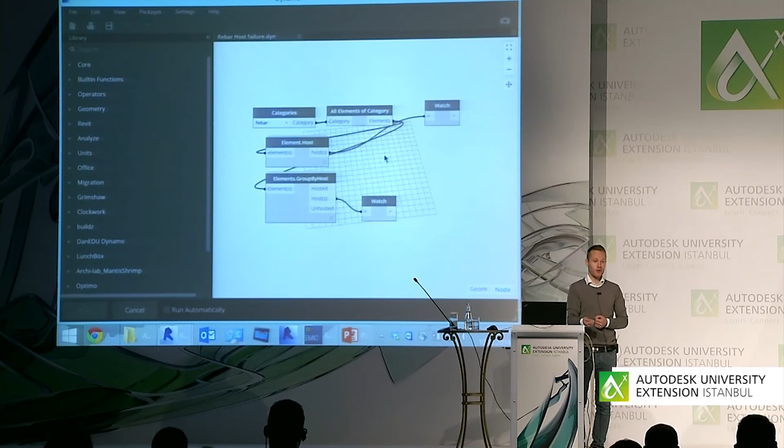It's a bridge for all designers to start getting actively involved in how software works and basically designing your own software. And this is the simplest example. If you want to check it out, you go to our webpage, dynamobim.org. It's an add-in for Revit. There's actually a guy next door here who did a double presentation on Dynamo. It's pretty cool. At Autodesk University Las Vegas last week, there were 25 presentations on Dynamo.

So download it, it's free, it's open source, it installs as an add-in to your Revit session. You can find it if you go to add-ins, Dynamo. And here you can start pulling data out of Revit, working it, and pushing it back to Revit. You can start doing stuff like getting host information, which you cannot do inside Revit. You cannot get information on the rebar of which host it is inside.

So it's super simple to do something like this, with just getting the category, all rebars, what's your host, what's the name of the host, and push that as a parameter to your rebar. Simple exercise. So this is the future, people. When I come back to AUX Istanbul in 2 years, we will have some fun with this, okay?